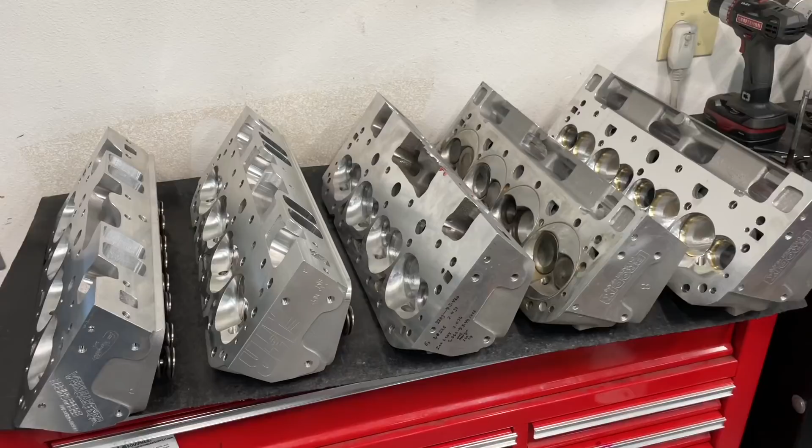I'm comparing small block Chevy heads from 23, 18, and 13 degrees, and even an LS head. I'll try to give you the rundown, and each one progresses to a little bit more aggressive as we go, and I'll give you some more information. So we'll go from left to right and explain what we have.

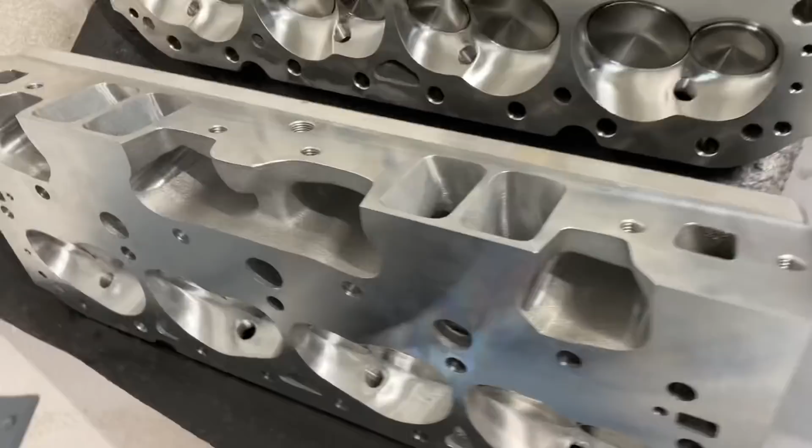This first one is my ported Dragon Slayer. These are a 23-degree head. It's a low port head, and it's 242 cc's. The next one up, this is an AFR. It is their 245, a 23-degree, low port head.

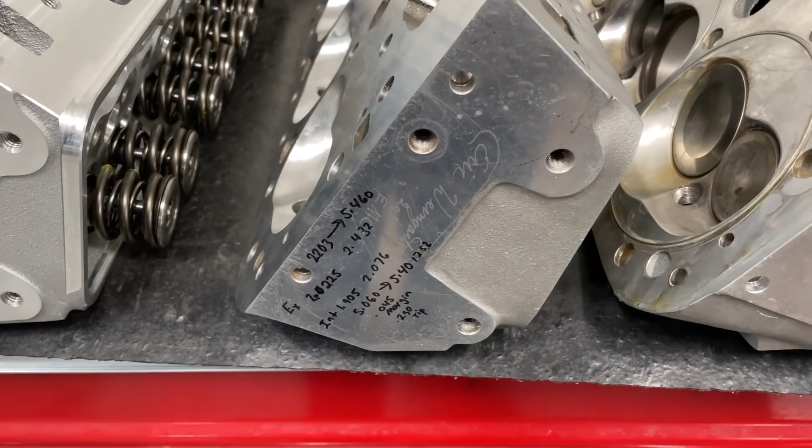All right, the next one up. This is my Brodix 10X RI. It's a raised runner 23-degree head, but it's a really small one, and I've got a big one to show you in between. I just couldn't fit it on the bench.

The next one after that is an 18C head. This is an 18-degree small block Chevy head, CNC'd from Brodix as well. And finally, for this part, there is a Brodix 13 head, which is a 13-degree head, and we'll be comparing them all. Also, over here in the corner, this one doesn't look like much - that's an LS7 we'll compare it to.

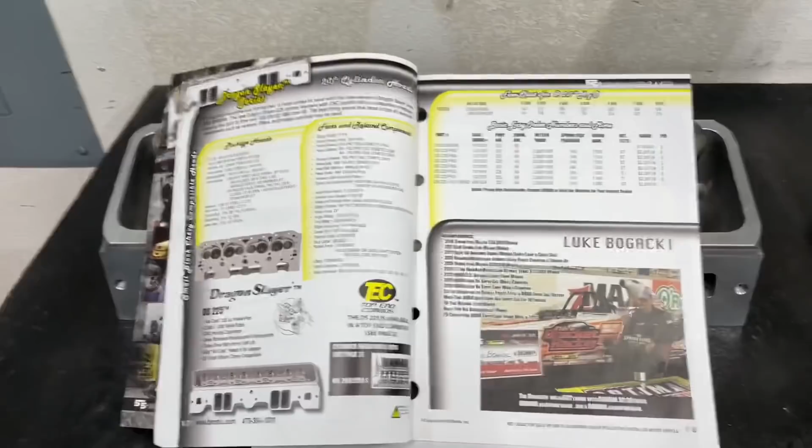Okay, for the first head, this is the Brodix Dragon Slayer. Now this is from their catalog, the 2020 - I don't have a 2021. This is what they claim this head flows stock. I'll go ahead and warn you, when I flow it on my bench, it went 292. So if you look at this at 600, it's supposed to be 302. It's about 10 CFM less on my bench.

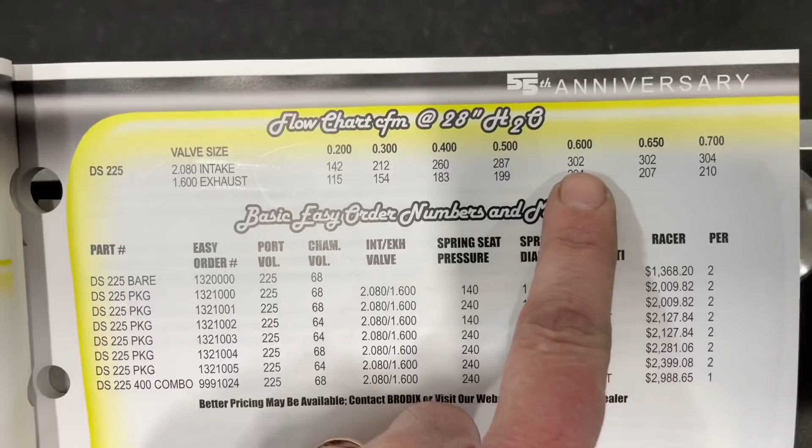But anyway, this is how it starts. That's not how I finish it. So this is kind of what I use for this head that I'm about to show you, which is my ported one. I do slightly different stuff that I have them do for me that's different from what you order from them, and it helps with my porting.

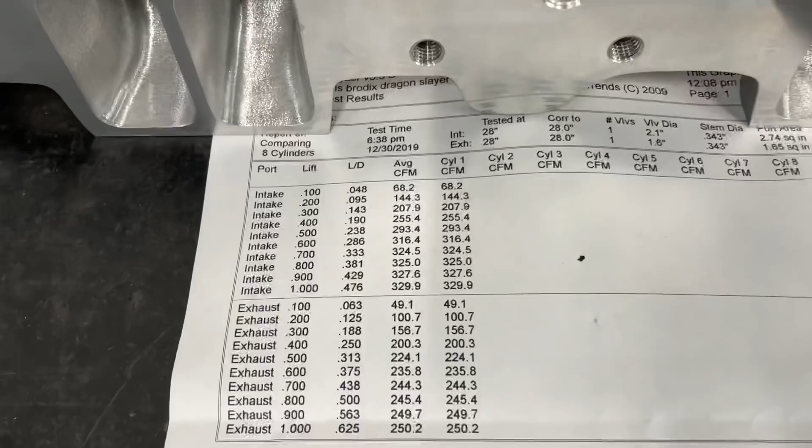So this is the first head, 23-degree, low port deal. This is how they end up - that's the flow numbers when they're done. Now what I'm going to try to do, because I'm trying to figure out this video editing software, is put a picture right after when I'm done talking about this head.

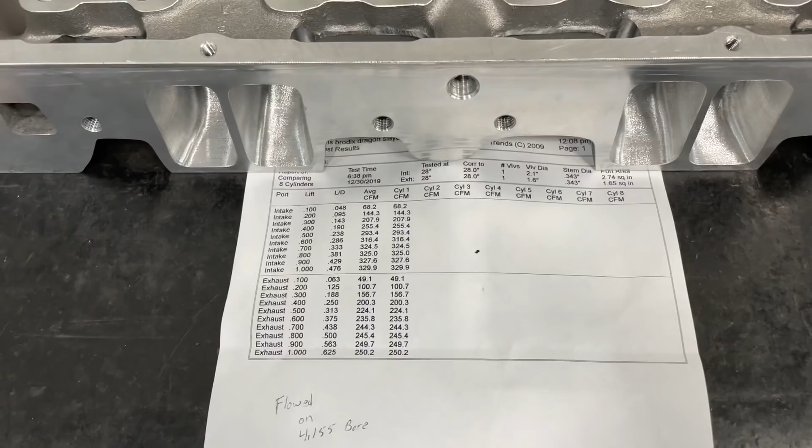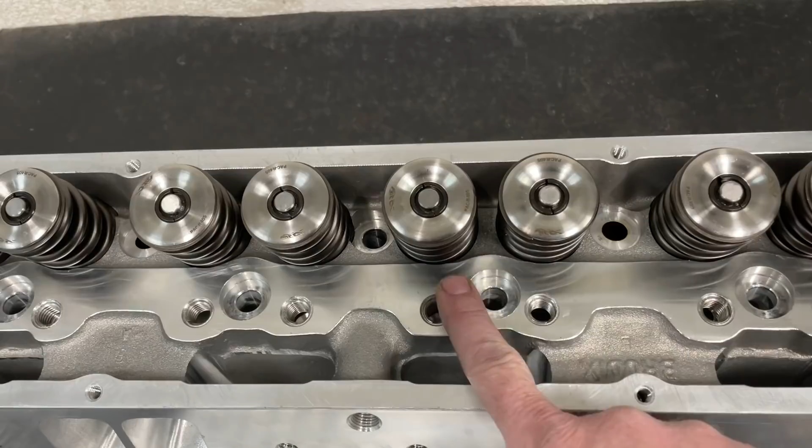But just to give you an idea, this is a 23-degree head. Now it's a low port, and it's standard valve spacing, which means the valves are just as they would be as from the factory designed them in the 1950s. Matter of fact, I think they're moved over a little bit - I think everybody did that, Dart and others, like maybe 50 thousandths. But for the most part, you can consider it standard valve spacing. It's not altered dramatically - it's what it was back when Chevrolet designed them, and that's what it is.

Okay, this one has a 2.10 by 1.600 valve. That's the biggest valve you can put in a standard valve spacing if you want to keep a 1.6 exhaust valve. Now, I've gone up to a 2.14 intake valve and a 1.560 exhaust valve to make it fit in a standard valve spacing head. This one's not - it's a 2.10 by 1.600.

This is the limitation factor for small block heads. They can be moved over, but then require shaft rockers. This head does not require shaft rockers. This is what they flow. Now, this is just a regular, about as ordinary a head as you can get for 23-degree.

Our next one up is the AFR, the AFR 245. Now, it's a step up - or I wouldn't say a step up, because I really think both my Dragon Slayer and this head are probably going to perform the same.

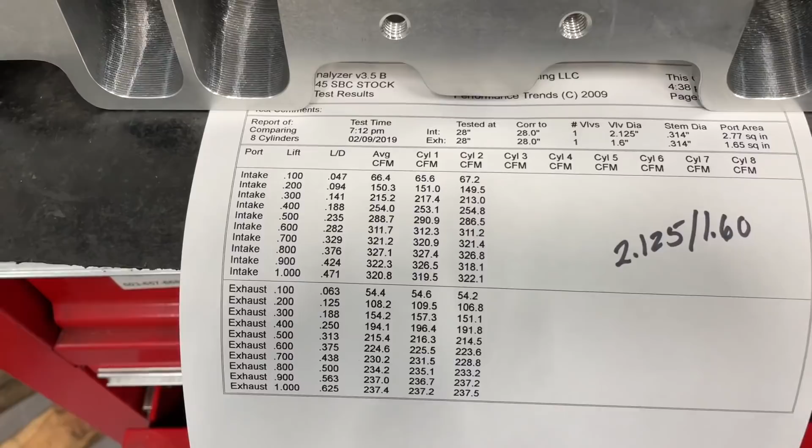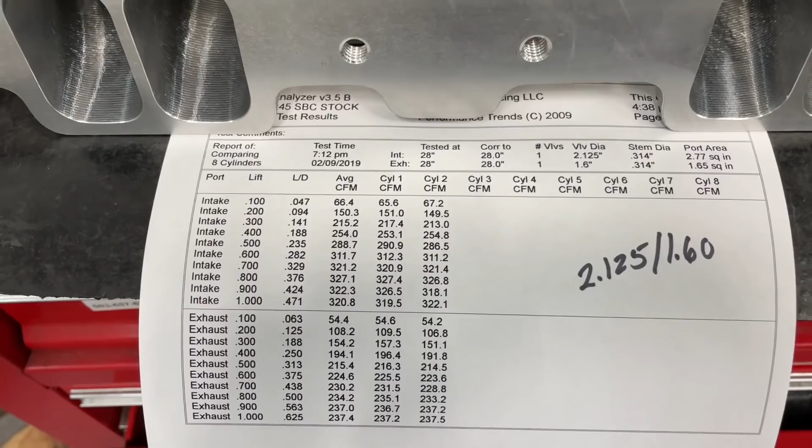Now, what's it flow? There it is. Now, if you notice, it actually flows less peak-wise than my 242, and also in some spots, well, for a good part of it, it's worse - it flows less than that head. But the reason why I say both of these will probably perform the same or close to it is because, well, I really think mine still out-edge it just barely.

Now, if you get my one without the push rod pinch on my Dragon Slayers, it's probably better. But the reason why these are pretty close is because this has a bigger pinch than my standard one with the shaft rockers. So even though this one may flow a little bit less, the advantages of the bigger valve and the push rod pinch closes up the advantage that's lost in flow.

But this is a 23 versus 18 degree head deal, and 13 degree - I'm just showing you some of the difference. Our next step up is, what if we took a 23 degree head but raised the intake runner? What does it do? This is the raised runner 10X RI, and it's a special casting. If you order the regular 10X RI, it won't be raised up this much - I'll go ahead and warn you.

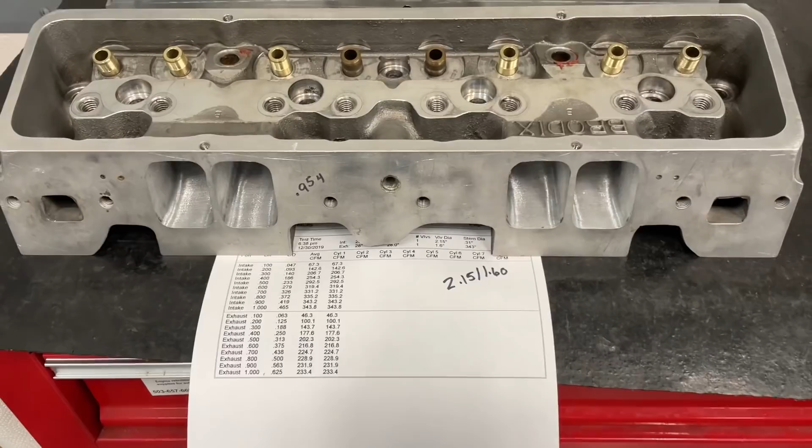But anyway, this is one of the ones I used for Engine Masters. As a matter of fact, this actually was on my Engine Masters engine. This is a 23 degree head, but it's got a little bit of differences. First off, this is a 40-60 spacing. If you remember when I talked about AFR, they were at 60-40. Brodix does a 40-60, which means they moved the intake valve over 40 from standard, but they moved the exhaust over 60.

Anyway, the big thing that gives that advantage is, of course, you can run a bigger valve. The biggest valve you can run with this valve spacing is a 2.15 intake valve and a 1.600 exhaust valve. That's assuming you kept the 1.600 exhaust valve. Of course, if you shrink down the exhaust valve, you could run a bigger intake valve. But this is a 2.15 by 1.600.

Now, I picked this head because it's actually pretty small. It looks huge, but this is really short - less than 2 inches, by the way. Just to give you an idea, the camera makes it look like it's massive. It is wide, very wide. Anyway, it's the same cross-sectional area, or really close to the 18 degree head you're about to see and the 13 degree head you're about to see.

So it's a good comparison for you. Now here's what it flows, just to give you an idea. Now this head, it's raised up.

If I look at where the bottom of the port is compared to the deck, or where the ground would be, it's 0.954 from the bottom of the opening of the intake port to the deck. That's a pretty good raised up. This is a really good raised runner head.

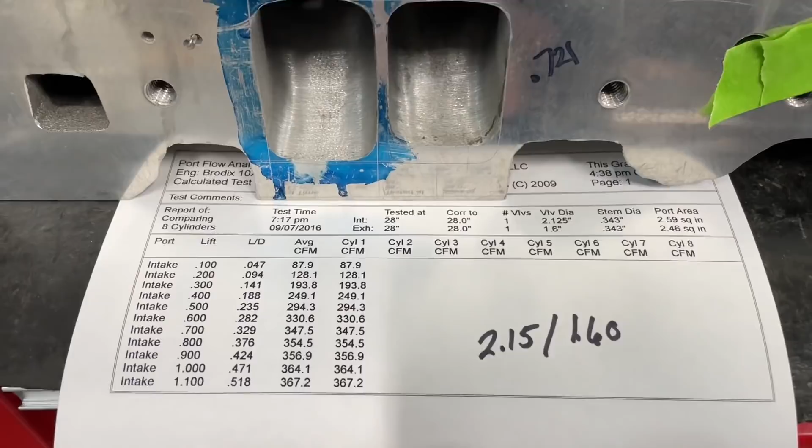It's still got the same size intake valve, and I haven't really had a chance to play with it to make the intake valve bigger - I'd have to shrink the exhaust to do it, but that's what it flows. So it's not the greatest, haven't worked on it in like 4 years, but it's not bad. In other words, it's 365 CFM out of a 23-degree head. It doesn't cost near as much as the All Pro, but I just thought I'd show you that one.

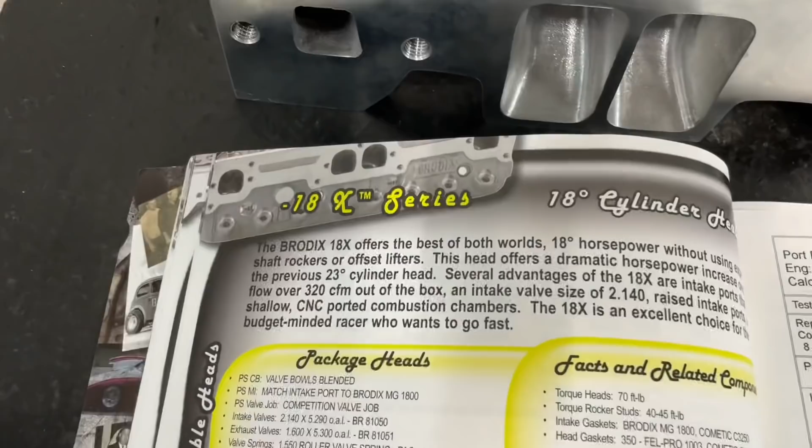Now to the next head. Someone had asked me about this 18X head, if I'd ever done it. This is from the Brodix catalog, in case you're wondering, and I don't have this head - I haven't done a head, but I thought I'd show you.

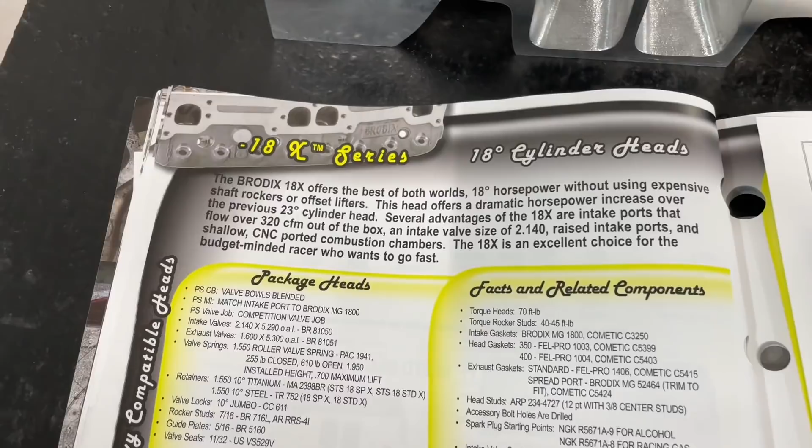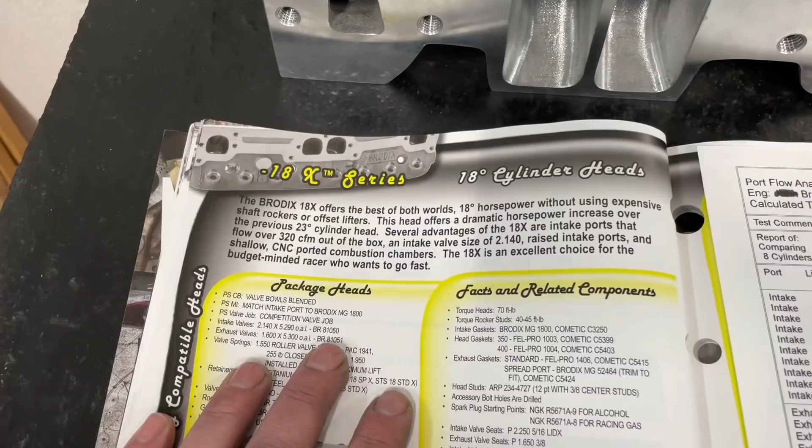This is an 18X head, that's what it's called, Brodix makes it. What makes this different from the other heads, as far as 18-degree stuff, is it's a 40-60 spacing, which means it's the same valve spacing as that last head I showed you, both the raised runner ones. So you can run up to a 2.15 by 1.600 exhaust valve.

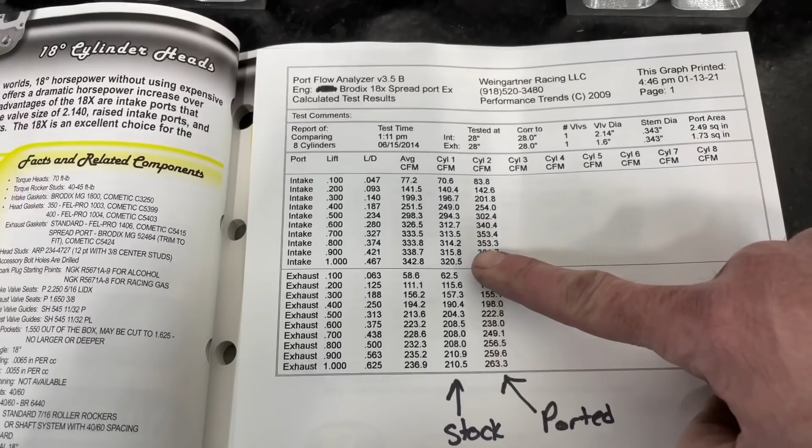Have I done one? Yes, this is what they have. So here's what it flowed stock - if you look, it's really not that good. Now you might say, I thought it was an 18-degree head. Yes, but because it's 40-60, the idea with this head was you could still run a stud mount rocker.

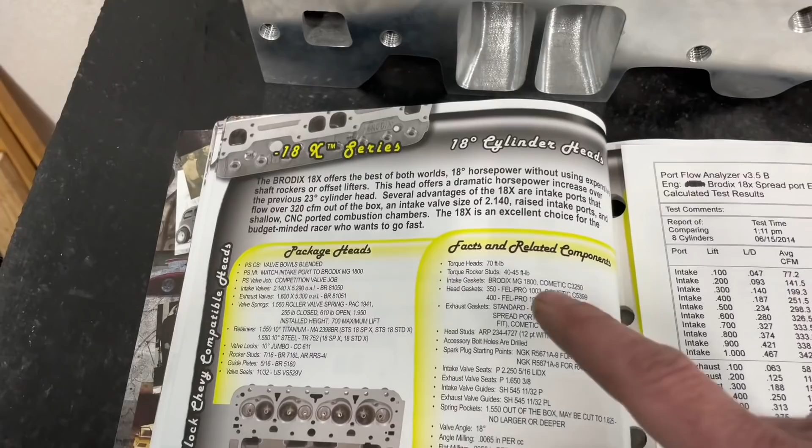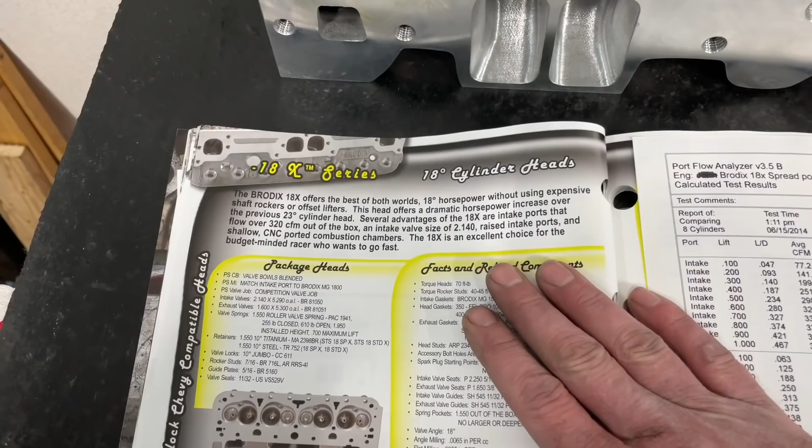You don't have to buy shaft rockers. So that was one thing they thought - well, we'll save customers money if they just buy, they don't have to buy shaft rockers. It saves them like $1,600, and you can run an 18-degree head, and this would be it. That was the idea of it, but because of it, it limited its functions.

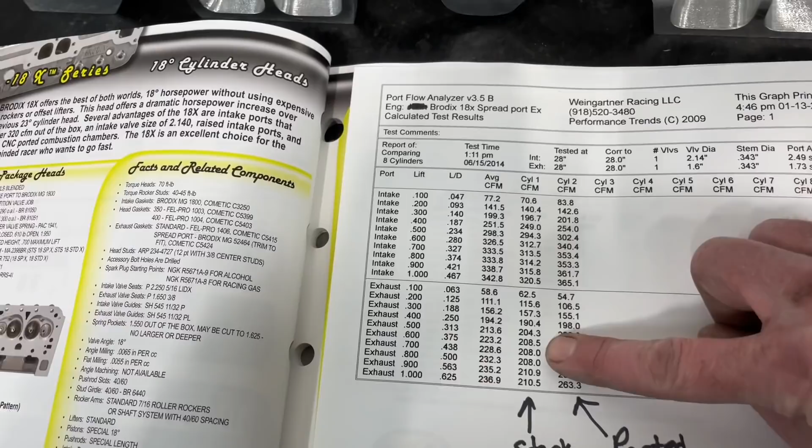So stock, it flows this, not very good. I went ahead and ported it, and after porting, it's not bad. So I mean, you look at a 600 number, you look at 340 CFM - that's a pretty stout number there.

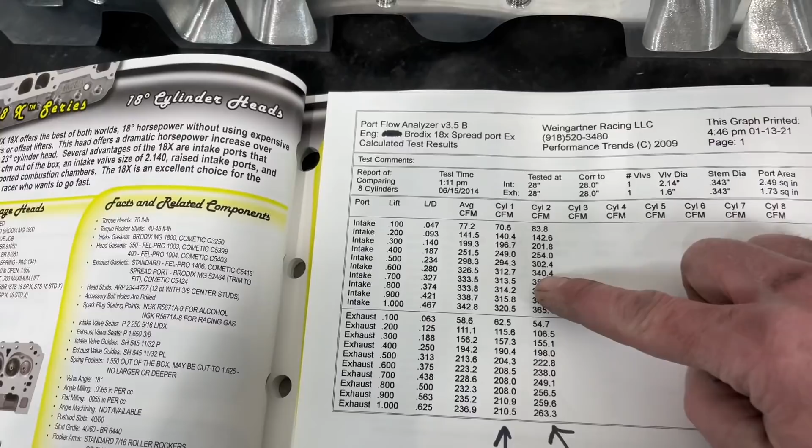How does that compare to the other ones? Not as good as a regular 18-degree head, but this kind of gives you an idea. Now to the real 18-degree head.

Before I show you the 18-degree head, maybe I should explain what I mean by degree. Let's pretend this is the valve inside the head. If this was the deck of the engine itself, this would be 0 degree valve angle. You could think of a 23 degree more like this. As you go to 18, it moves this way, getting closer to the deck, and so on. So like 23, 18, 13 - the valve's moving this way.

Because of that, you get some advantages. As it comes this way, the chamber itself starts getting smaller because it's getting closer to the deck. So an average 23-degree head has a combustion chamber of 64 cc's. An 18-degree will have one in the 50s, and the 13-degree has 47. The reason is the valve keeps moving down, so the chamber size gets smaller. There are advantages and disadvantages, but I wanted to explain that before showing the actual 18-degree head.

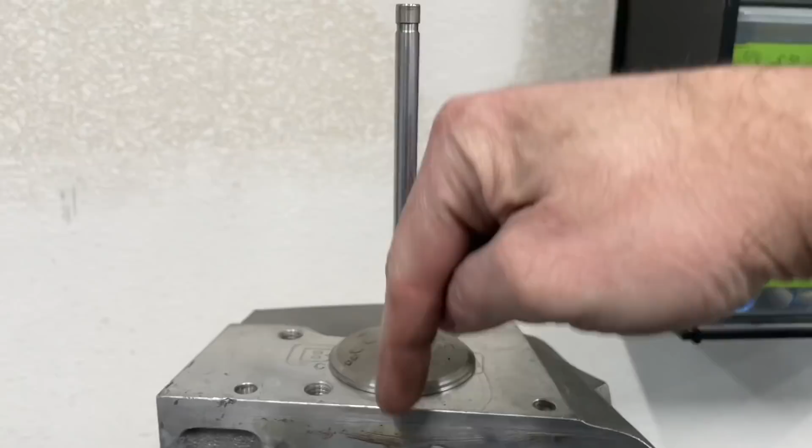The other thing to note is you can't just put an 18-degree in a standard port head, because the valve tilts, so the port's going to tilt that way too. If I have an 18-degree head, that port is taller this way, coming up, so the intake port opening has to keep rising. On some Ford heads - not that anybody watching a small block Chevy video has paid attention to Ford stuff - they have a 20-degree valve angle, but some people put an 11-degree with the stock opening. So they tilted the valve really this way, but the port opening stayed the same height, so now it has to make a gigantic turn to get back over. Ideally, when you lower the valve angle, you raise the opening so you get more of a straight shot in there like it's supposed to be.

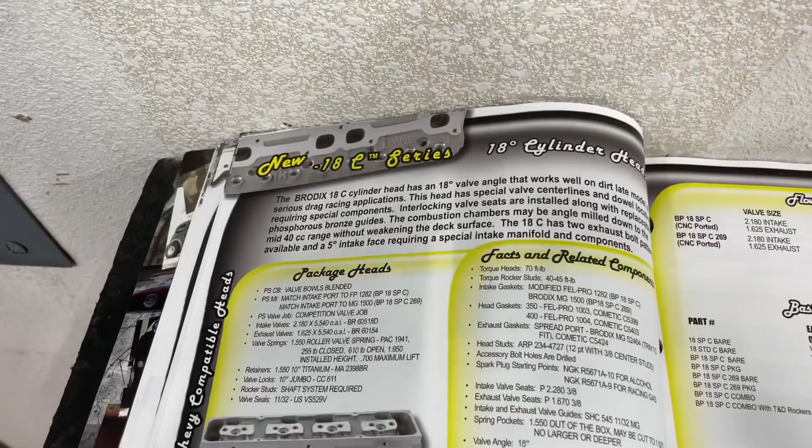Now to show you, this is the 18C head. In case you're looking at the Brodix catalog and wondering what it is, that's this. This is what they claim it flows. The port size is really tiny, and that's what this one is.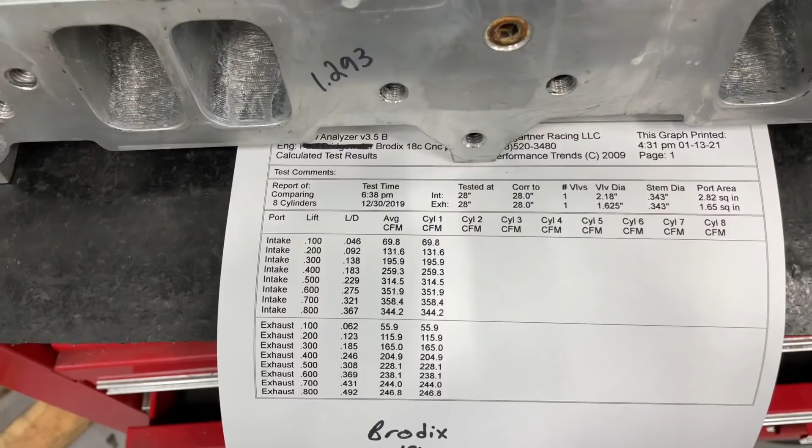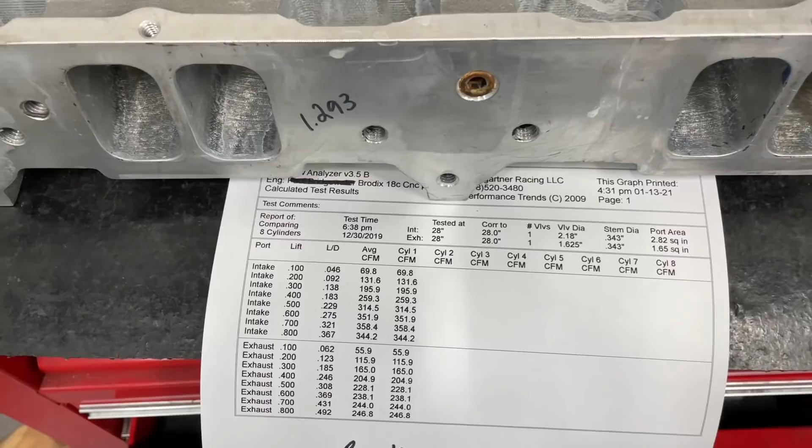So here we are. I measured from the deck - see how they leave a gap here. A lot of the 18 and 13 degree heads do that. From the bottom of the opening on the intake port to the deck is 1.293. This is what it flowed - not as high as you'd think. The last one I showed you, the 18X, actually outflowed this one, but in all fairness that was after I ported it, and it's actually a bigger port than this one. Now I am going to port this one, and it'll probably crack 400 CFM.

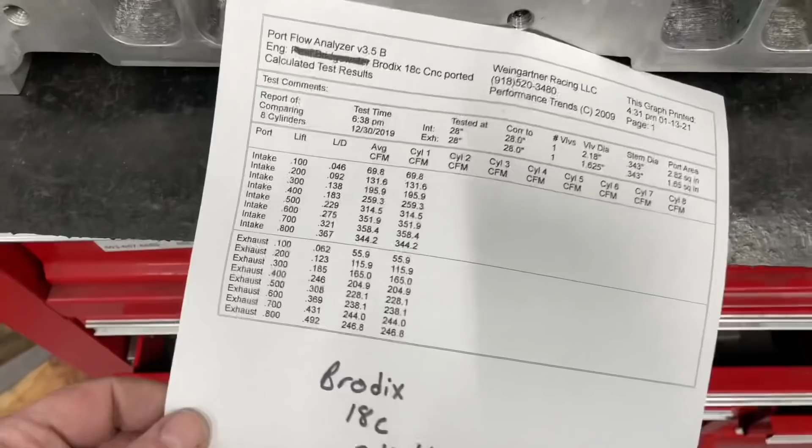Something to note is these 18-degree heads, just as they are from Brodix, are a 218 by 1625 valve. What that means is it's got a really large exhaust valve, and it could have had a bigger intake valve. If you look at Brodix right here, it tells you the valve spacing on them - it's a 58-107, which means it moved 58 thousandths this way and 107 thousandths on the exhaust side. So you can tell the valve spacing's dramatically changed.

What other differences are there between an 18 and 23 besides the flow? You also cannot run stud mounts - the 18X allowed you to run a stud mount, but this one you have to run shaft rockers because the push rod pinch has moved over. You'll notice that. It also takes a different intake manifold because the face where they grind these is a different angle than it is for 23 degrees.

So if you try putting a 23 degree valve intake manifold on here, besides the bolt holes not at all lining up, it won't fit anyway. It's the wrong angle, so you're looking at an extra cost. You have to have shaft rockers, have to have a different intake manifold, and here's the other one.

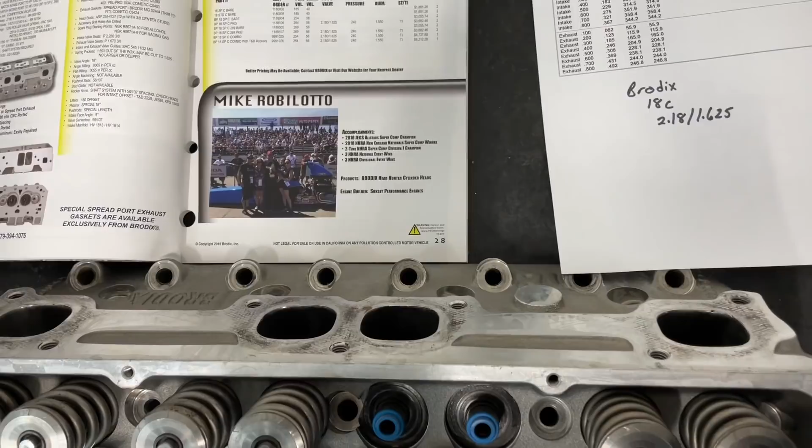That's the exhaust ports, this is a stall pattern. Now some 23 degree heads do have a stall pattern, and you can order any of my heads with the stall pattern if you want. But this is also a spread port where the exhausts are actually spread apart. Some 23 degree heads are this way, but if you don't have this already, you're gonna have to buy a whole new set of headers. And a lot of them don't make a shelf header to fit most chassis for a spread port exhaust, which means custom headers.

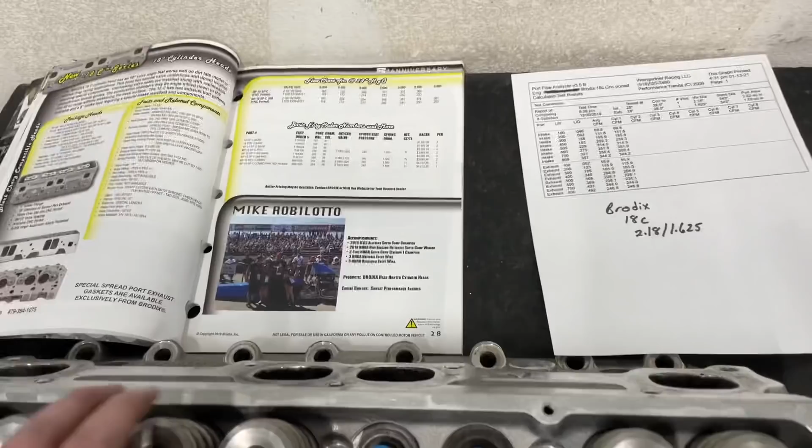Anyway, that's this head. Not bad, works really good. I will end up porting this, but I just thought I'd show you what that one is. Now to the 13 degree.

Psych! I forgot to show you one other thing. There's one other head that Brodix sells that's not in their catalog. So if I'm looking at this in the 2020 catalog, it goes from 18C and right to the dash 13, which is the next head I'll show you. But you could still order this head, and it's insanely expensive - for an 18 degree head, it's insanely expensive. This is their 18X AP.

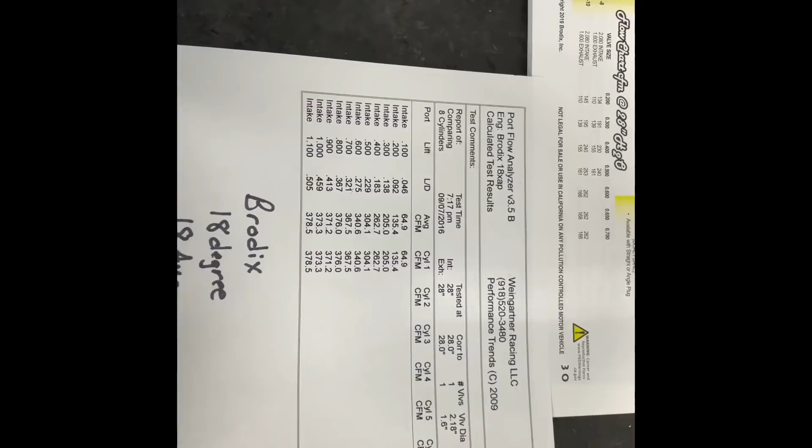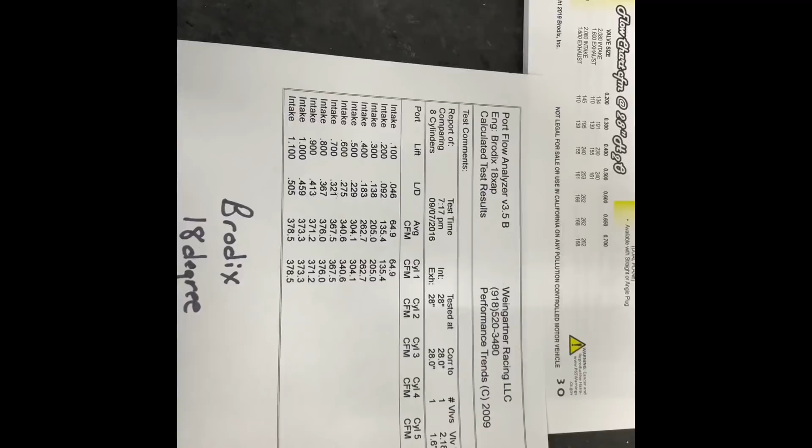It was designed by WeldTech. I'll try to include some pictures to go with it after this one. It's the best flowing head for an 18 degree one, but it's not at all for drag racing. So it flows really well, but they have weird flow stuff in it, like a huge lump in the center of the port and a long wing. It kind of helps with the flow.

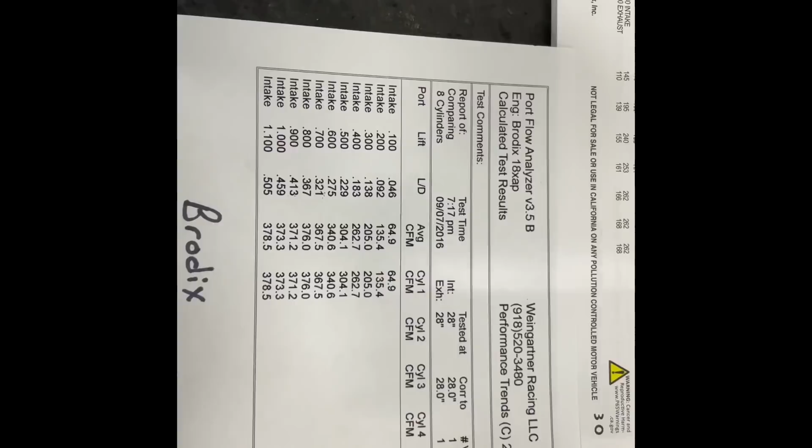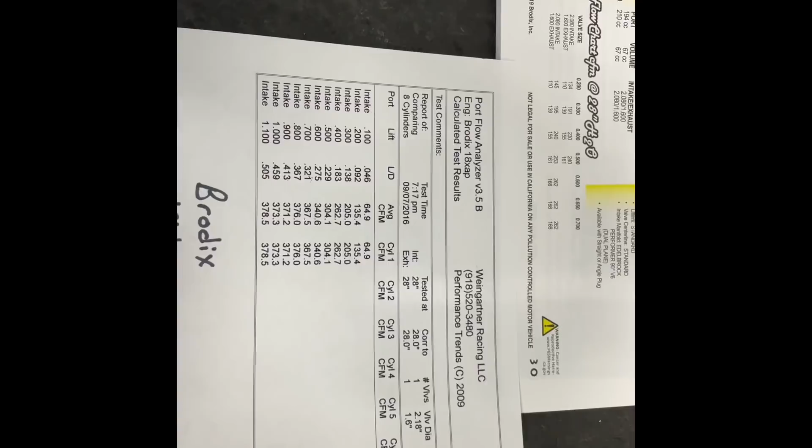This is what they flow. So you can tell it flows better than 18C, but it's more designed for circle track. It's not that it wouldn't run well drag racing, but it's just not what you would hope. But anyway, that's what its intake port flows. I didn't flow the exhaust. So I will attach pictures if I can figure it out, but I thought I'd show you that one.

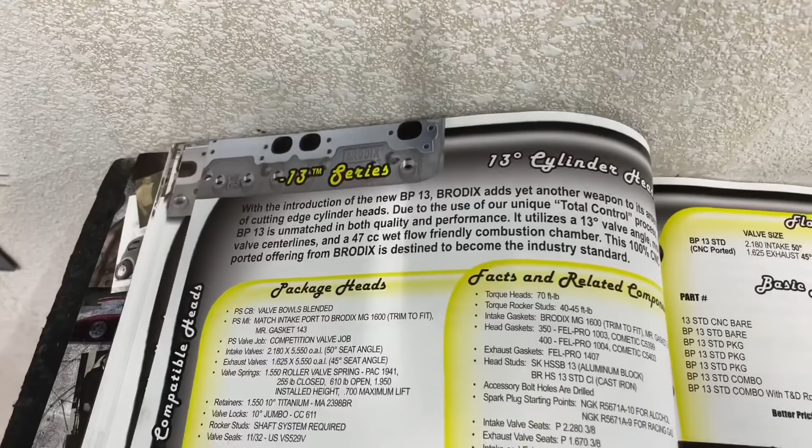This is the 13 degree head. So this is the Brodix Dash 13, in case you're wondering what it looks like. That's it in the book. And this is what it claims it flows, like 370.

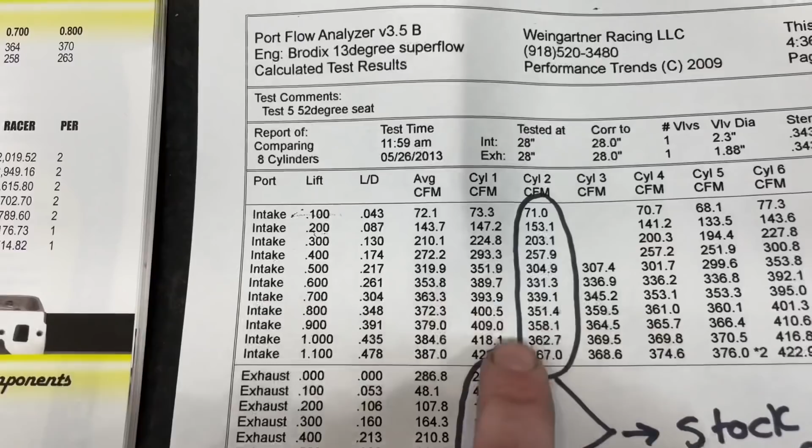This is actually what I got from it. This is the stock numbers right there, and that's the stock exhaust. In case you're wondering what potential it has, this is one of them. This is not the best one I've done. This is after porting and a bigger valve.

Okay, so here you are. Now this one, because it's a 13 degree, they also realize you have to raise up the intake port. So the intake port from here to the deck is 1.674, so it's raised up more. Now this one has the same intake valve size as the 13 degree, or as the 18 degree you just saw, at 2.18 by 1.625.

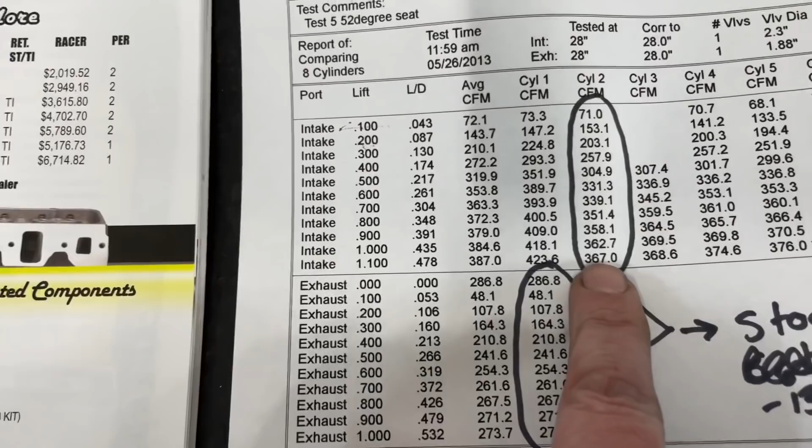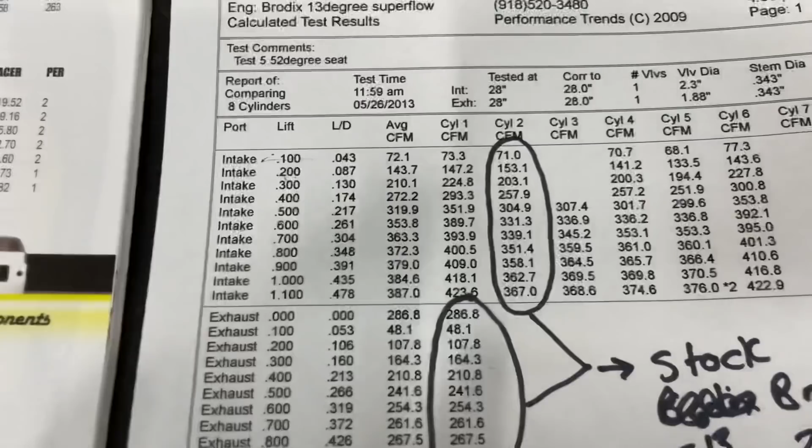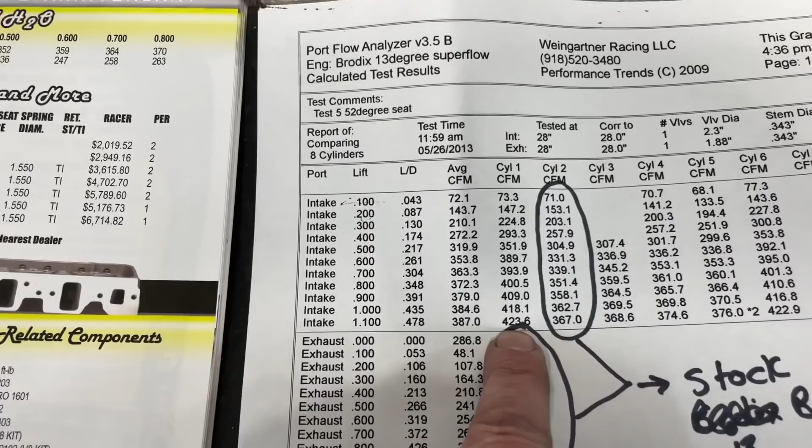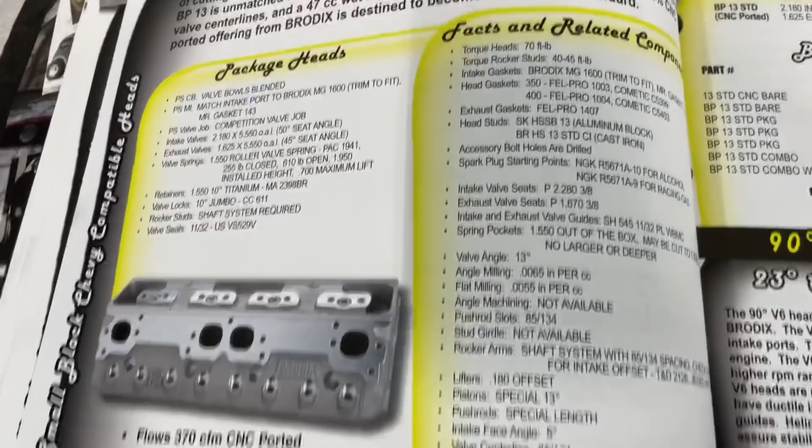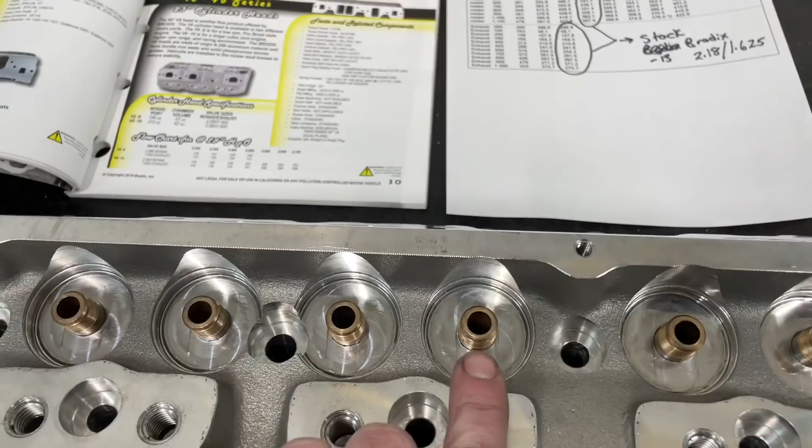It seems confusing because, like, I want to say this one is - I'm gonna look here at the same time - I think it's 283 cc's. I should point out too, if you look at the valve center line, because they move it even more, so it's 85 over this way and 134 over this way. So it gives you much more room for a bigger valve than this, than even in the 18 degree head.

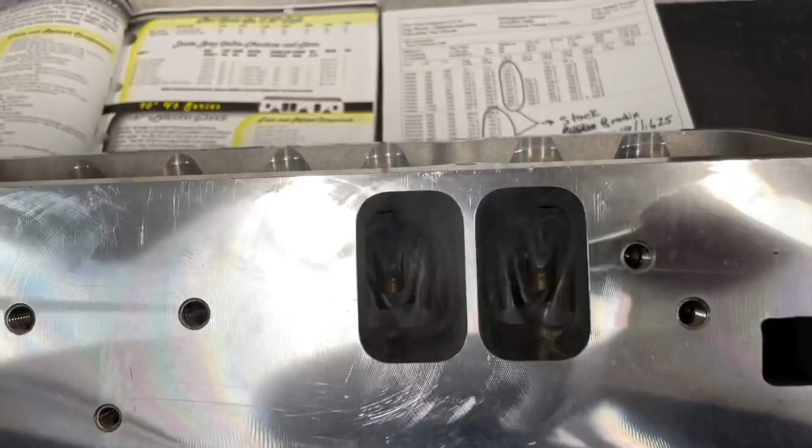But even though it's 283 cc's, it kind of confuses people because this port is way longer than the 23-degree head we started off with. So this is close to 6 inches long compared to the 23-degree one we first started with - it's like 5.4. So it's almost a half inch longer, and that half inch takes up volume. So that gives you an idea. Now also the chamber shrinks too, so this one's down to 47 cc's, really small.

The weird part about this head is if you order it from Brodix, or you order it from me, the head itself isn't that much more than, say, the AFR 245. But it'll get you extra stuff.

Just like the 18, you have to run shaft rockers, can't run standard ones because the pinch is moved over. The intake manifold becomes an issue too because you can't run a standard one, so your options are limited. There's just not a whole lot out there. It used to be more, but Brodix stopped making some of them.

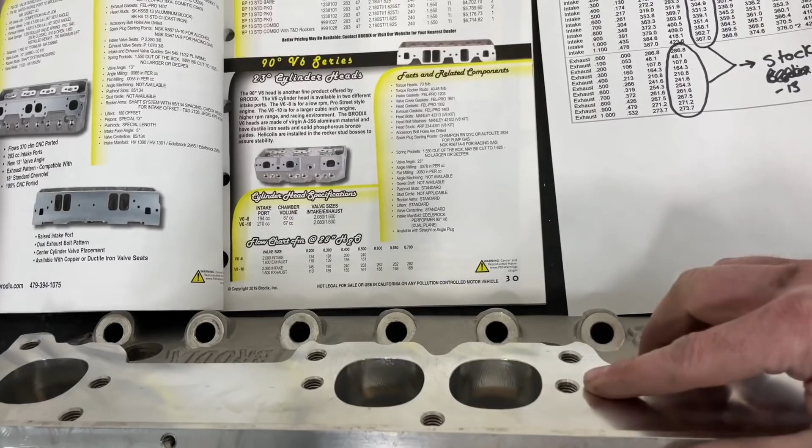Next thing is the headers. Now if you look at this one, it's got the stall like the 13-degree did, but this is called the 18-degree pattern. So you'd think it looks like the regular small block Chevy. It's not, this is way wider. So you've got to get custom headers as well.

I instruct most of my customers that if you're going to go 18-degree, just skip it and go to 13, because the price difference from this head to the 18-degree head is probably not even $100. And you still have to have the same stuff: shaft rockers, a special manifold, custom headers if you don't already have them. And you're going to buy pistons anyway, so this is probably what you should go with.

It's got more capability, and you're like, how is that possible? One, the valve spacing is better. Two, because the port's raised up more, it gives a lot more opportunity for airflow to have a straighter shot to the valve. And the chamber itself is usually smaller, which helps out in NA stuff.

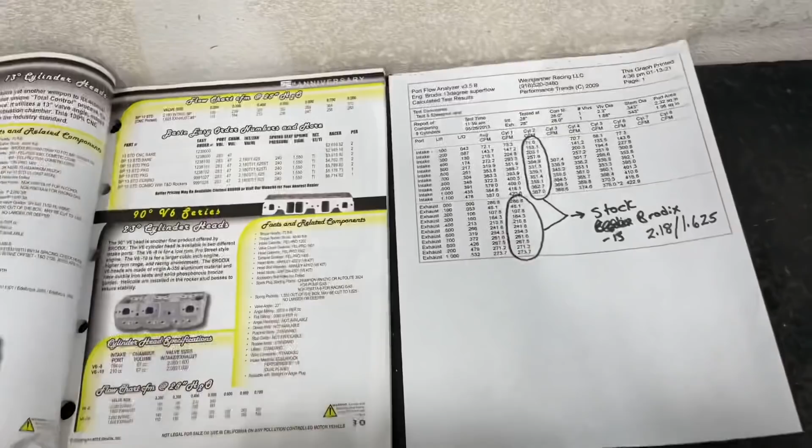You're like, well, what about power adder? That's what this one's actually going on. You can have these heads done with a conical cut where they CNC soften them - meaning they dig a curve out this way. It makes it almost a dish before the chamber and helps with power adder stuff. So that's it as far as those go.

Now one of the questions is everybody thinks LSs are better. Let's look at a stock LS7 and how it compares to this head. This is a stock LS7 GM head, CNC ported - before someone says it's not the same comparison because they're not CNC ported, what I'm really doing is comparing the small block Chevy with the LS at this point.

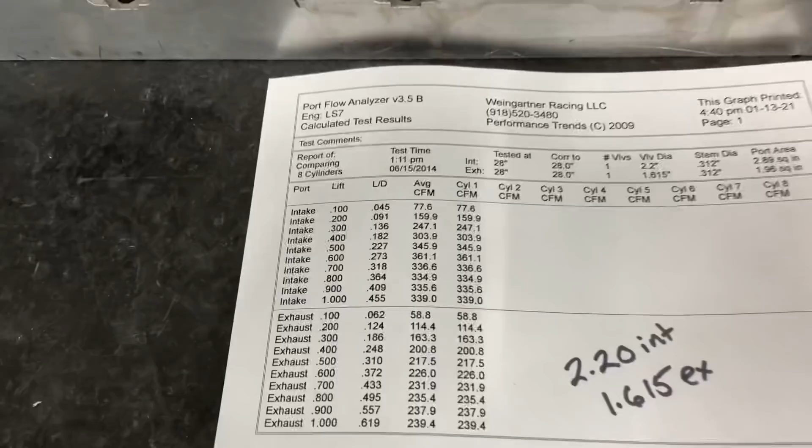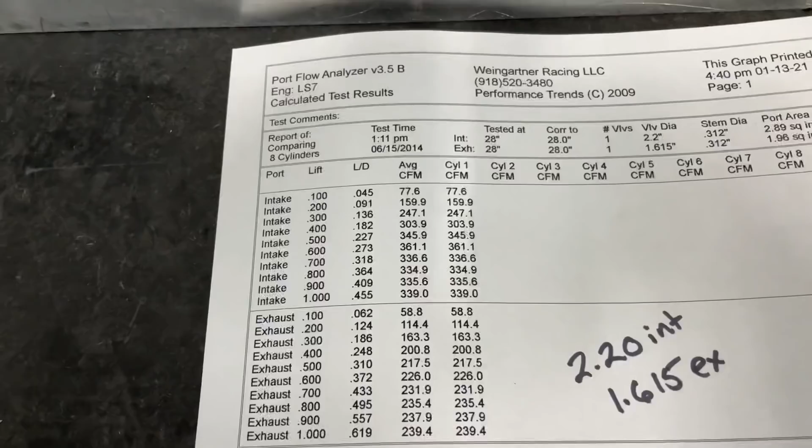This is what the head flows. If you're noticing, it's not even in the same ballpark flow-wise in some areas as the 13-degree head. In some spots it's better, definitely at 6. I mean, you look at 6, that's a pretty stout number.

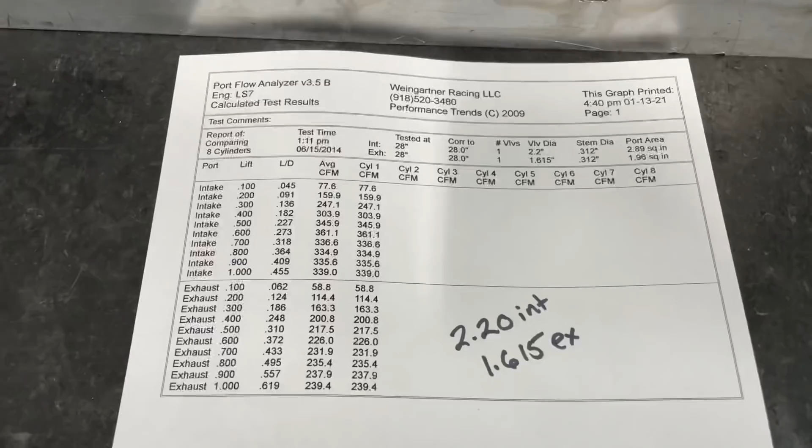The one thing is this has a much bigger intake valve - you look at 220 intake and 1615 exhaust. So from the factory it has a really big intake valve, which gives it a huge advantage. However, if you look at its flow, it hits 361 and then dies.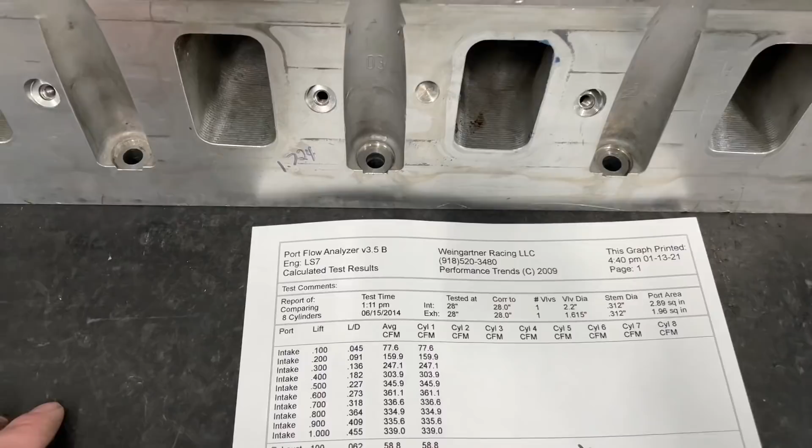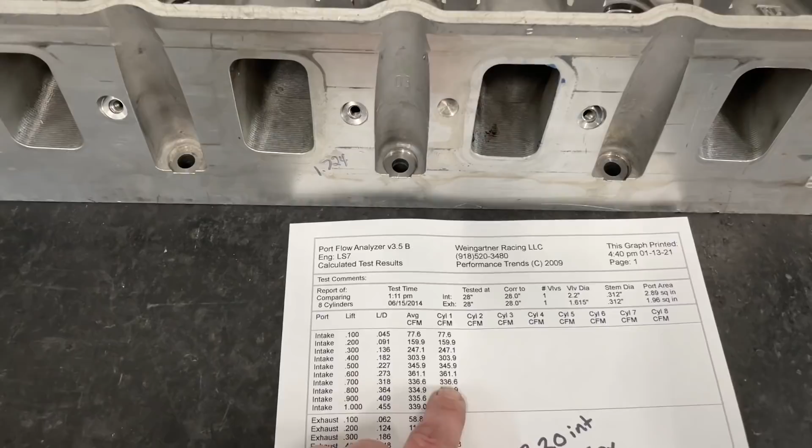If you look at the 13-degree, and I'll put them all up together, that 13-degree is for sure better on the exhaust everywhere. The intake port, I think the only spots that really beat it are maybe between 5 and 6, and I'm trying to remember off the top of my head so I could be wrong when I post these. I definitely know not there.

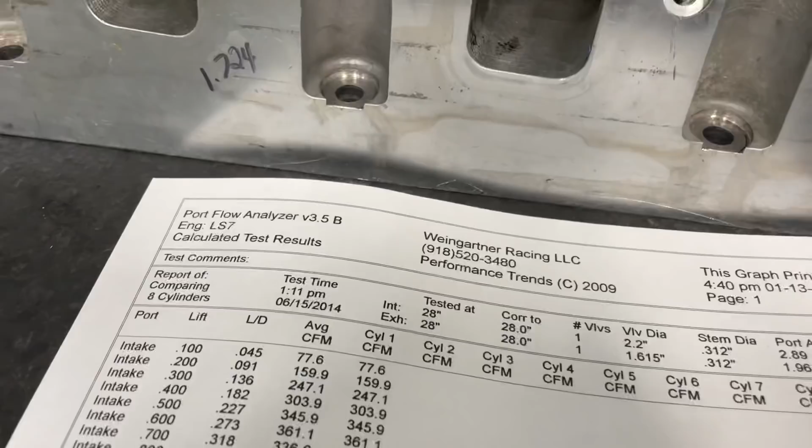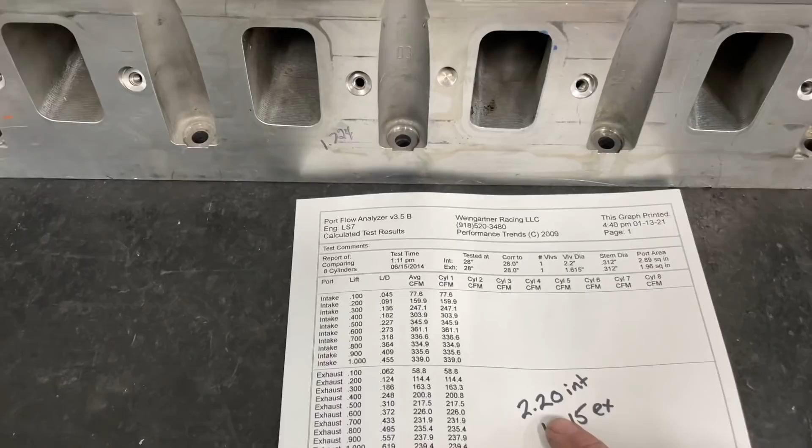So from deck to the start of the opening of the intake port, you're at 1.724. And if I'm looking at my 13-degree head real quick, it was 1.674. So this one's raised up even higher - more than even our 13-degree stuff. There's no doubt the LS7 head here has more potential than the 13-degree just because of the big intake valve and taller raised up port.

But here's the thing, this is a stock GM casting. So what that means is I can't get as crazy as I could with a 13-degree, because with aftermarket stuff they leave things more beefy and get the water out of the way so I can grind pretty good. I'm fairly certain if I got really crazy with this one, I'm going to hit water - it's just the nature of the beast with that GM casting from the factory.

But anyway, there's your comparison - how they flow, what the differences are. There you go. Long video, a lot of heads. There you go.